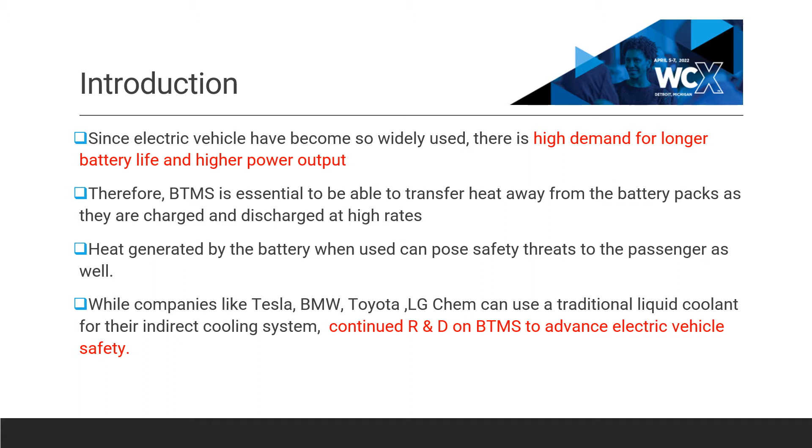So during vehicle operation, it charges and discharges at high rates. And also, heat generated by the battery can pose safety threats to the passengers as well. So this is an extreme condition of the battery, and while companies like Tesla, BMW, Toyota use traditional liquid cooling for their indirect cooling system, there is continued research and development on BTMS to advance electric vehicle safety.

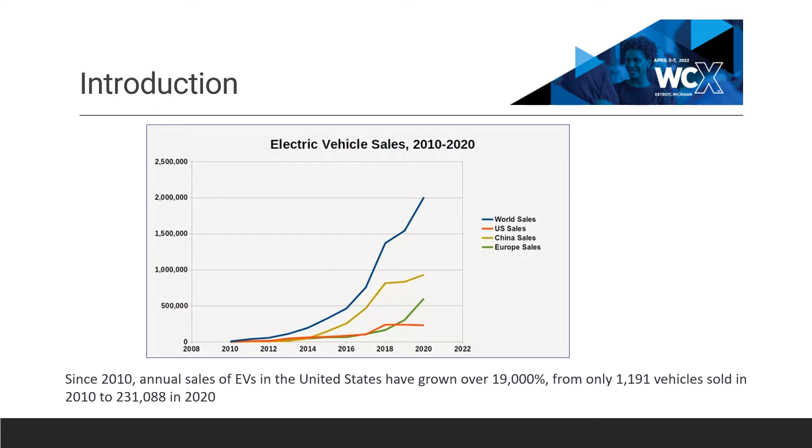So to get the most out of the battery, it is really important to keep an eye on its operating condition, especially temperature, which has been shown to have a direct impact on battery performance and life. So that's why BTMS is very important in controlling the thermal behavior of the battery. A good system simulation tool can minimize the time and cost of designing such a complicated thermal management system. That's why we need a promising simulation tool, which would make designing the BTMS much easier.

A simulation model also needs to be able to easily synchronize with the simulation program of the vehicle and be useful in assessing different control strategies. So that's why in this study, we built and simulated a more general and popular battery thermal management system using MATLAB and Simulink.

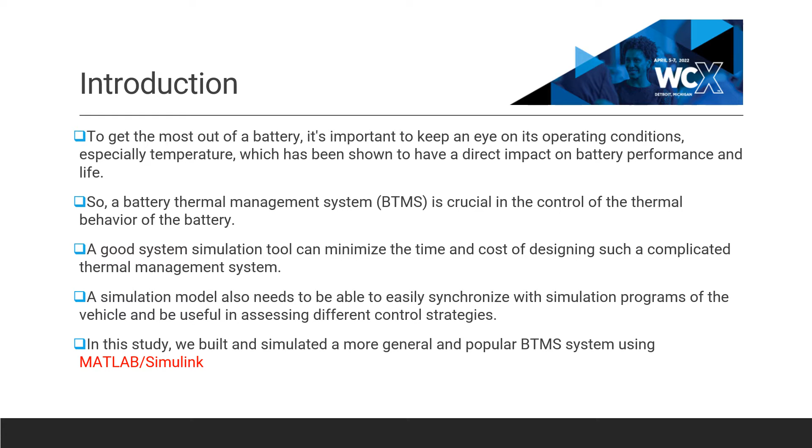Well, let's talk about modeling of the battery thermal management system. We can see this equation, which typically consists of cooling, heating, insulation, and ventilating, which basically follows the conservation of energy equation. Because chemical interactions in the cell are complicated and heat generation is difficult to anticipate, factors like chemistry, charge and discharge profile, construction, ambient temperature, and state of charge play a very vital role. So this can be expressed with the second equation, which is shown there.

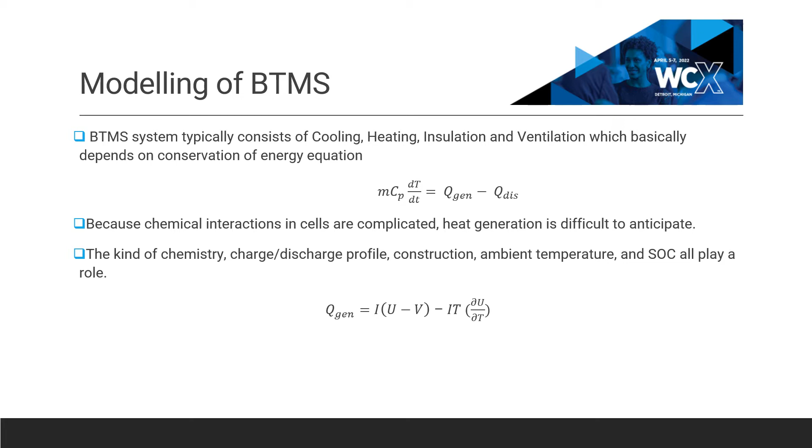This is a diagram of a typical battery thermal management system, which we have developed using the Simscape Fluids Toolbox of MATLAB Simulink. Here we configure the system input, that is the drive cycle or charge cycle. We took the FTP75 drive cycle as our input, and we can see the heating and cooling unit as well here. And it consists of three branches to switch operating modes, that is, heat and cool the battery.

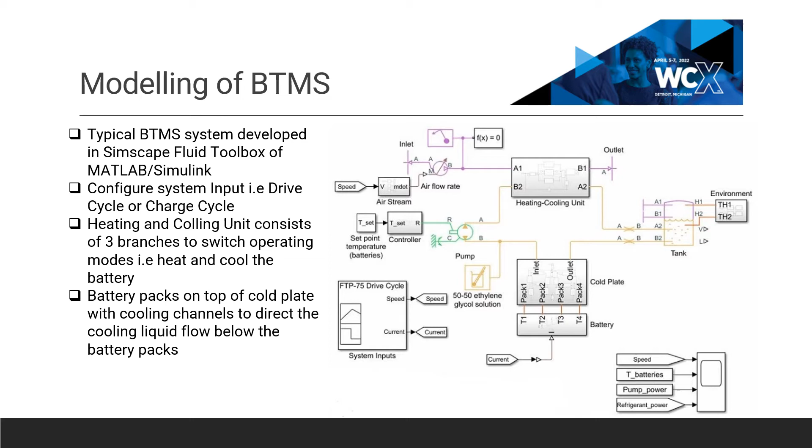And we can see the battery pack on top of the cold plate with cooling channels to direct the cooling liquid flow below the battery pack. So this is a schematic diagram and also a MATLAB Simulink model which we have prepared. Let's discuss each unit separately. Here we have a battery pack subsystem in Simulink. We use four battery packs, each at temperature T1, T2, T3, and T4. And we can get these temperature values in the battery using the Simulink model.

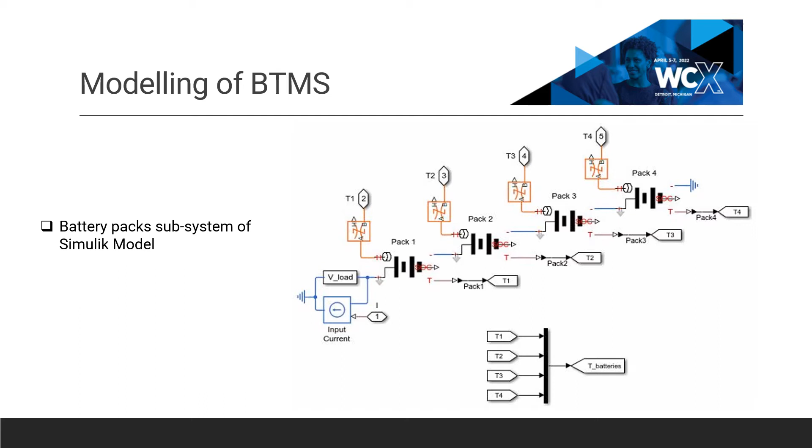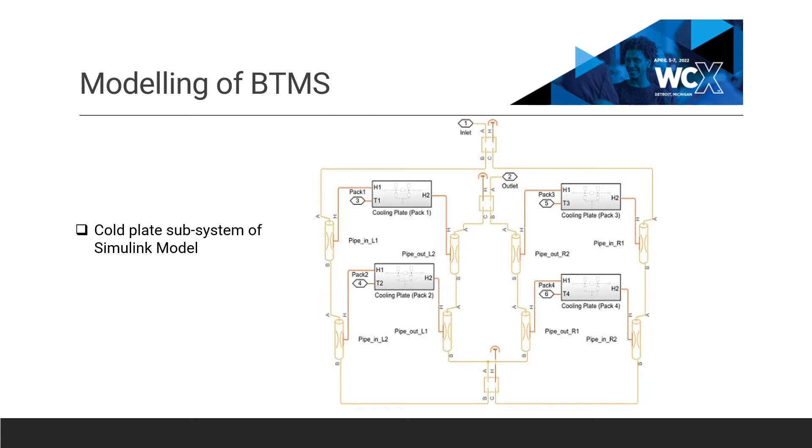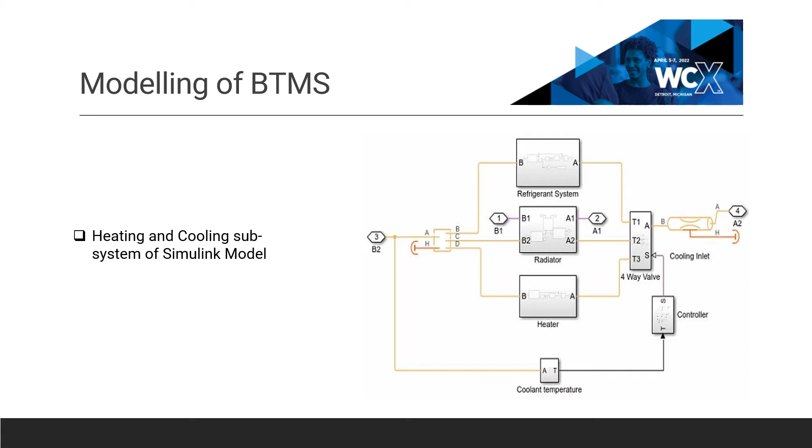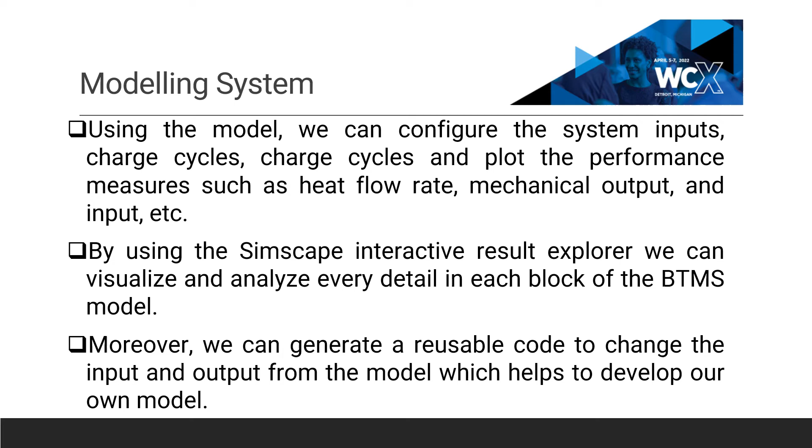Using the model, we can configure the system inputs, charge cycles, and plot the performance measures such as heat flow rate and mechanical output and input of the system. By using the Simscape Interactive Result Explorer, we can visualize and analyze every detail in each block of the battery thermal management system. Moreover, we can generate reusable code to change the input and output from the model, which helps to develop our own model.

Here, the system simulation is performed using the FTP75 drive cycle, which is a federally approved drive cycle where the vehicle runs at different velocities and speeds for a certain time period, which will encounter different temperature scenarios inside the battery. In the United States, the federal test procedure FTP75 is widely used for the environmental certification and fuel efficiency testing of light-duty vehicles.

And we can see the parameters here. We have used 31 ampere hour lithium-ion cells, and the mass of the battery is about 250 kilograms. The battery specific heat capacity is 795 joules per kg Kelvin, and the total vehicle mass is about 1700 kg, including the passenger. So this is our modeling input condition of the simulation.

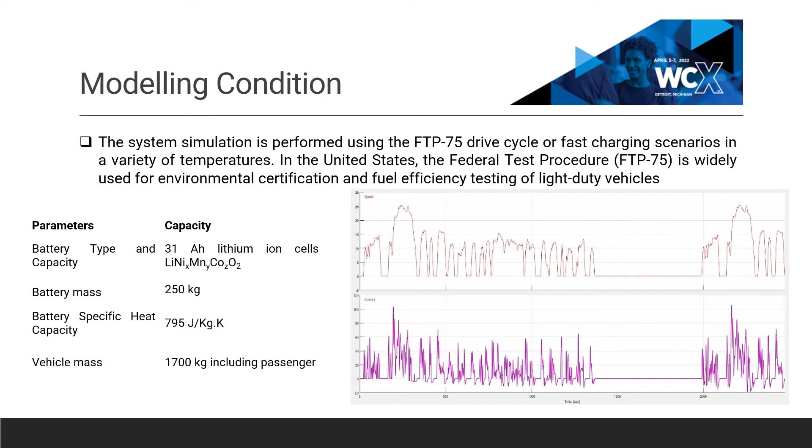And this is what we got in our simulation result. We can see the vehicle speed, battery pack temperature, power, pump power, and refrigeration power in kilowatts in the graph. So we can see the temperature inside each pack of the battery, which is within the limit of maximum temperature and minimum temperature,

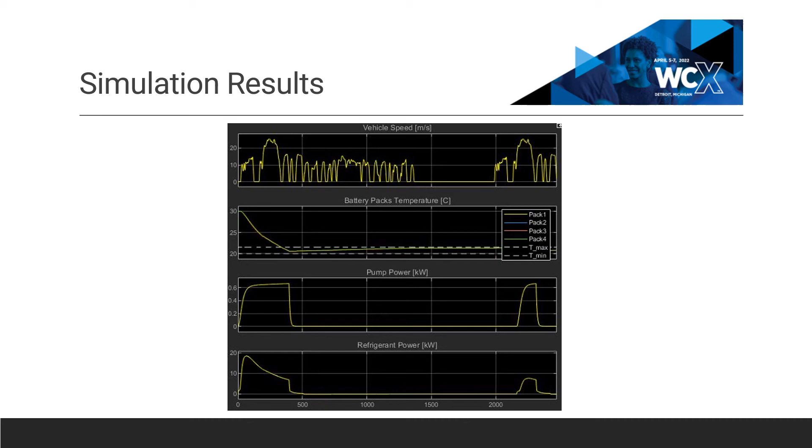while the vehicle speed goes up, or after some time, the temperature inside the battery pack gradually decreases, but within the limit. So it follows the limit: the temperature difference between each pack should not exceed more than 5 degrees Celsius. That's why we can see from the plot that it doesn't exceed the 5 degrees Celsius limit. So we can get really good results from our simulation. And we can also see the pump power and refrigeration power in the plot as well.

And this is the result where we can see the heat generated by the battery pack, and all the battery packs have approximately the same amount of heat generation. And then we can see the heat flow rate inside the coolant, and also the contribution of the cooling branches like the refrigeration system and the radiator system.

Another graph on the right side is about the current, voltage, state of charge, and temperature inside the battery pack, and how they are related. So we can see here as well the temperature inside the battery. All the battery packs are almost similar, and it doesn't increase that much, staying below the limit. The temperature difference between each battery pack is less than 5 degrees Celsius.

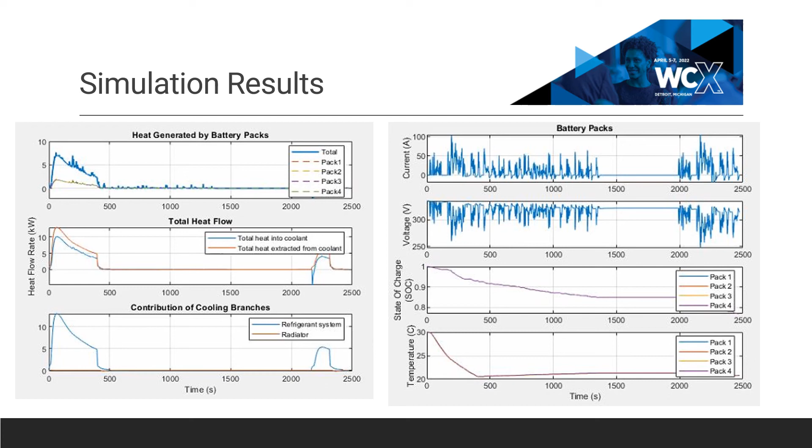So this is a simulation result which we validate using different experimental data found in the publication. The MATLAB Simulink model of the battery thermal management system used in this study is validated using the experimental data provided by the battery developer. This is one validation criterion. Another one is experimental data of a 31 ampere hour lithium-ion battery from the Kokam manufacturer, consisting of current, voltage, state of charge, and temperature at different times of FTP75. This is provided by the manufacturer.

And another one, we can also validate this result with the experimental data that can be found in the research work of Tarun et al. We have provided this reference link in the reference section of the presentation as well.

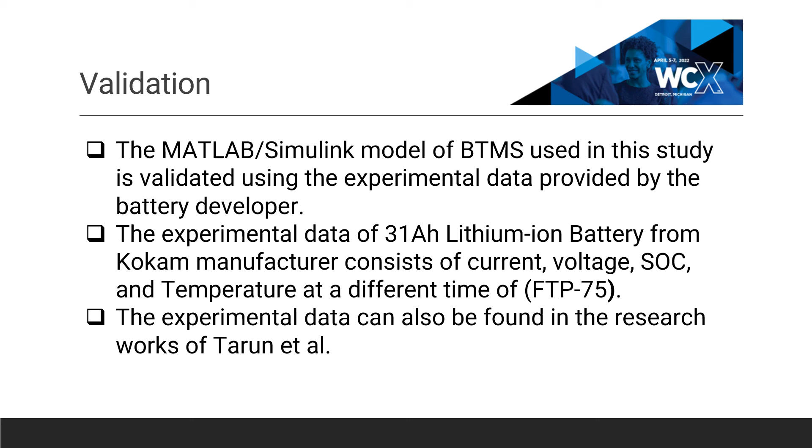So we can see that driving behavior, battery starting temperature, and ambient temperature influence the battery thermal management system. Different driving cycles can change the battery thermal management system features in hot weather, but less significantly in cold weather. So it varies in cold and hot regions. The ambient temperature was the most relevant variable because it affects the BTMS. The battery initial temperature, which represents the preconditioning treatment, had a substantial impact on the energy usage, particularly in extreme hot and cold temperatures.

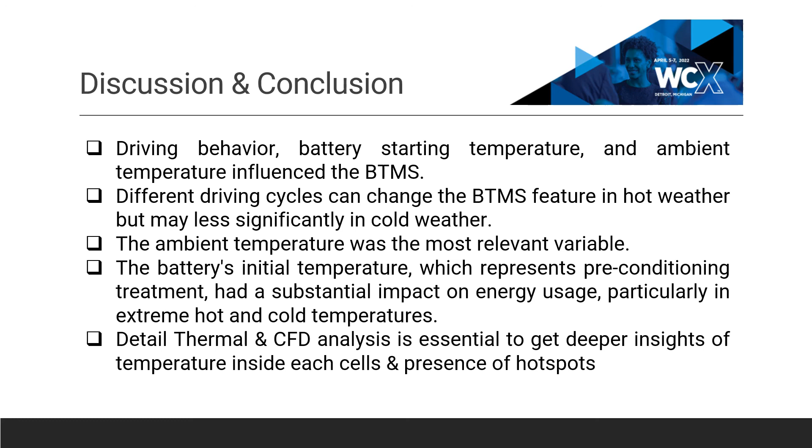And also, we can see that detailed thermal and CFD analysis is essential to get deeper insight into the temperature inside each cell, because we can see the overall temperature of the cell, but if we want to see the temperature inside each cell and the presence of hot spots inside the cell, we need to do the detailed thermal and CFD analysis.

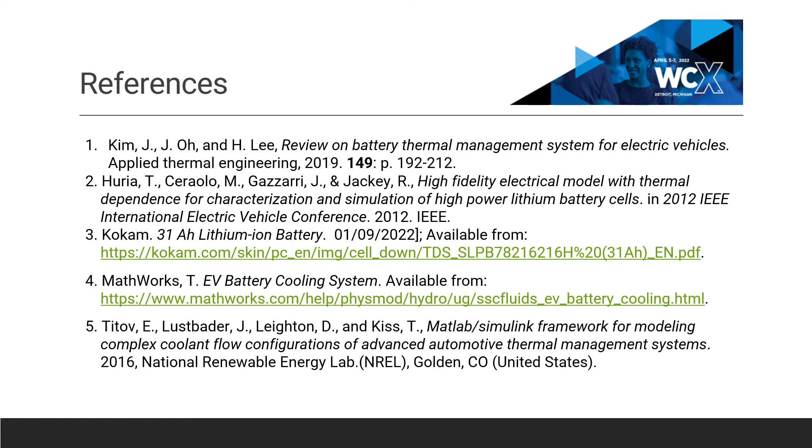So here are some of the references we have used. We have used Kokam, the battery manufacturer, and we have also used some of the MATLAB Simulink resources, and for validation purposes as well, we can see these references.